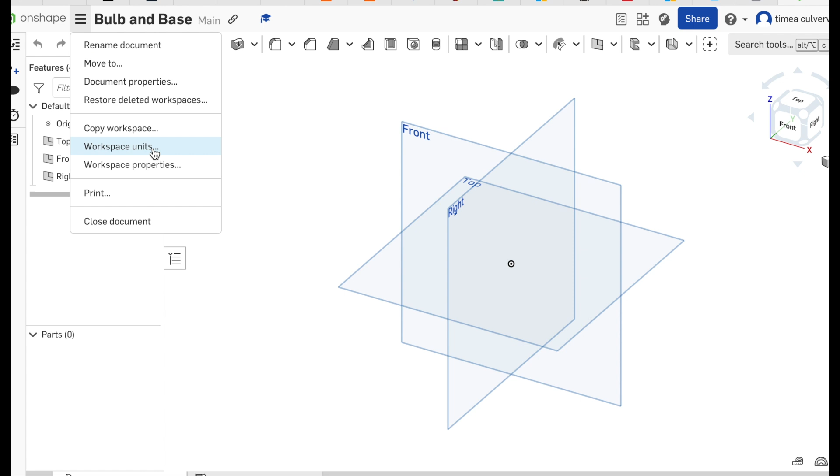Create a student account, unless you've made an account already, then log on. Click Create and select Document. We're going to show you how to make a bulb and base, so give it a name. Select the 3 lines and check that your workspace units are set up in millimeters. If it's set up in millimeters, you're ready to start.

You need to select a plane. The plane is what you're going to be able to draw on. If you select the cube at the top, you can bring this round to be facing you. Select Sketch and draw a rectangle.

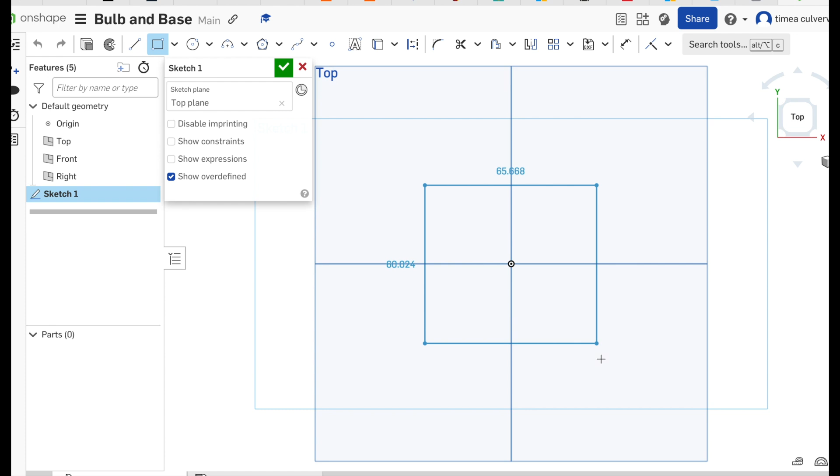Now we need to make a square that's 50 by 50. Select dimension and change these dimensions to 50 mil each, then select the middle line to the edge and make this 25. This just centers your square in the middle of your plane, making it easier to work with.

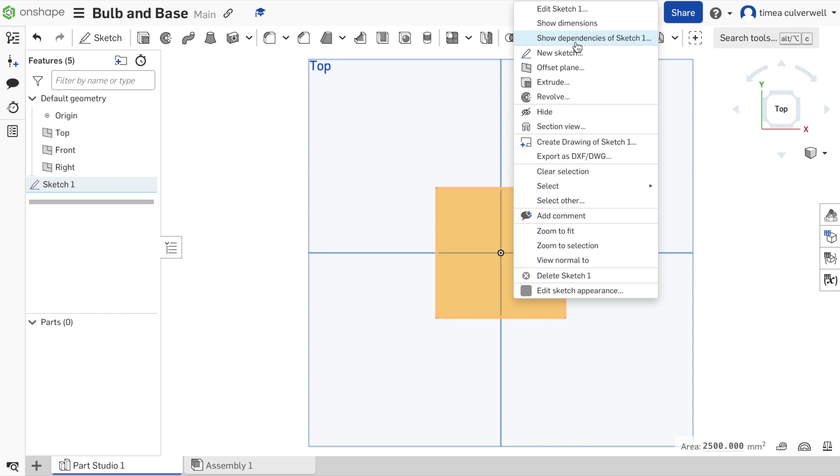Click the green tick. Now we need to add a circle in the middle. Right click and select Edit Sketch to open the sketch back up, then select the circle tool. Draw a circle and use the dimension tool to change the diameter to 20 millimeters.

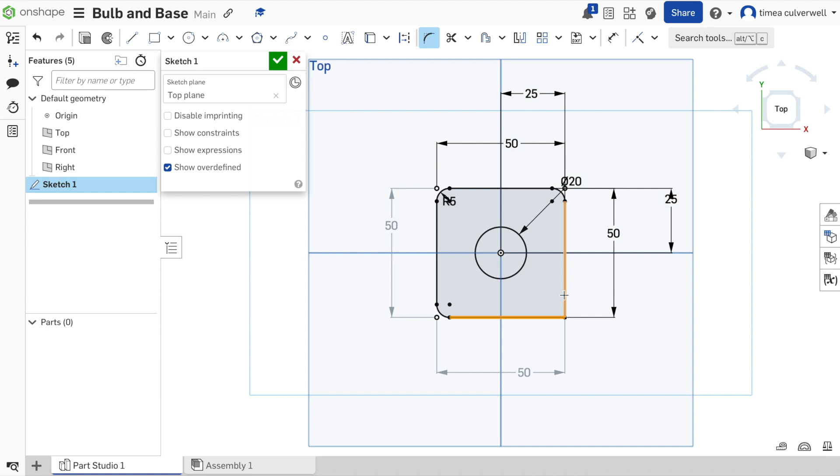If you then click on Sketch Fillet, you can select 2 edges and create a fillet with a radius. Automatically 5 mil comes up, that's fine for this. Finish that off with the rest of your corners, and when you're done, click the green tick.

Select the area you want to extrude, turning it orange, and click the extrude tool. We're going to change this to 10 mil, green tick, and this will extrude the area you have drawn. That's the first part done.

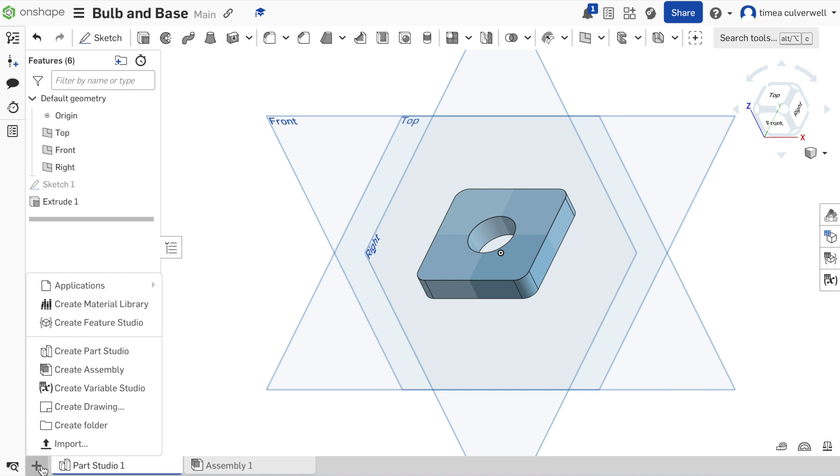Click on Insert New Tab, Create Part Studio, and you can open up a new part. This time we're going to be drawing on the front plane. Select the front plane and click the cube to turn it to face you. Sketch - this time we're going to use the line tool.

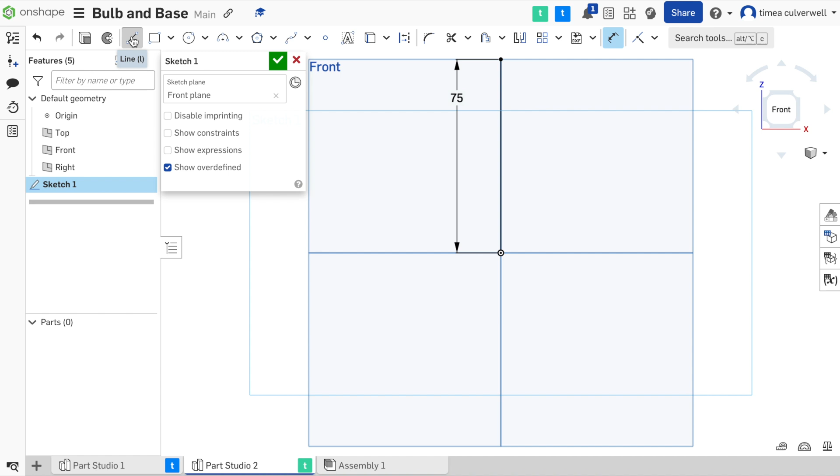Draw a line that's 75 mils up. Another from the bottom 10 mil out to the right, and another from there 10 mil up, using the dimension tool to change the length.

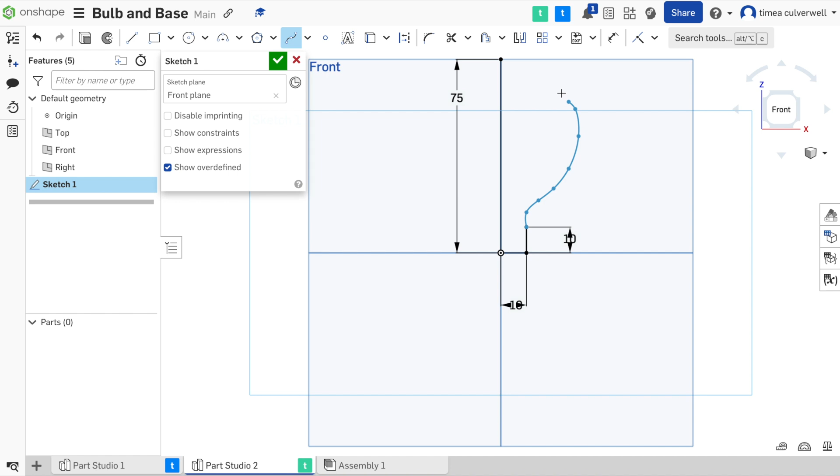Next you'll need to use the spline tool. Click the top of that last line you drew, and every time you click, you can pull the line in a different direction. When you finish, you can double click. We're trying to make a bulb shape, so we're trying to make half of a bulb.

If you want to edit your part, deselect the spline tool so you have a free mouse, and then you can use these little dots to adjust your shape.

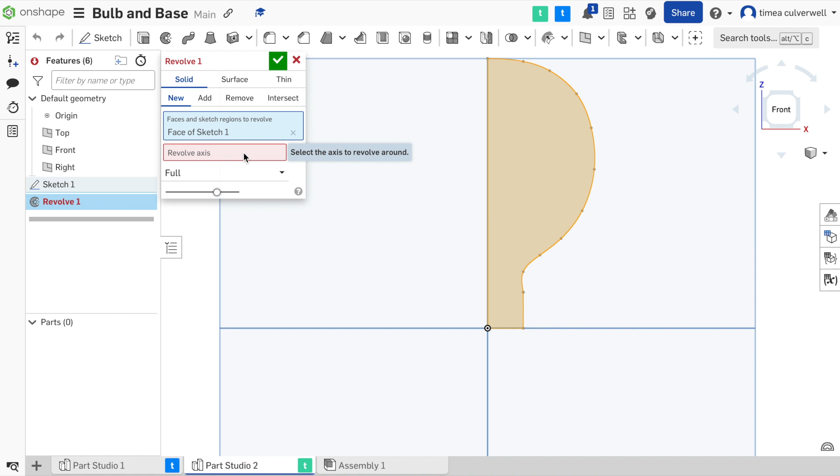When you're happy, green tick, select your shape and click the revolve tool. Deselect the red, select that central line, and it will revolve the shape you've drawn around that center line. Green tick if you're happy.

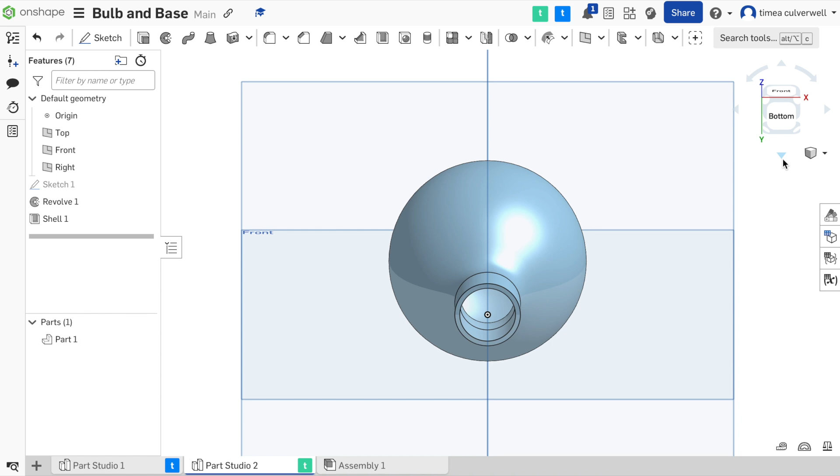We need to make this bulb hollow so it's like a light bulb. Use the shell tool, change the thickness to 1.5, and this will hollow out your bulb. Okay, so that's your bulb complete.

Now you need to assemble your parts. Go to part assembly and insert, both of your parts will appear here. Slide both of your parts into your assembly and then click the green tick.

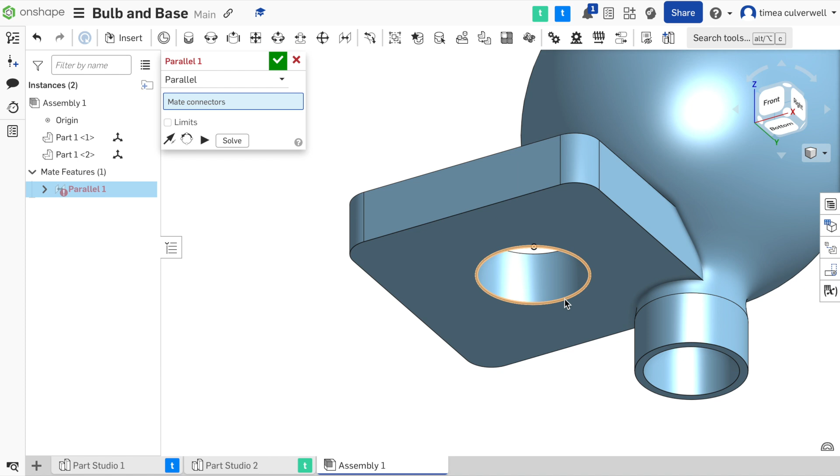You need to join them together. Select parallel mates and select the outside ring and the inside ring and join them together. Now you have joined your parts.

Well done. If you want to edit anything, you need to go back into the part studio. So here I'm going to add a filleted edge - 5, maybe 3 instead, that looks good. You could add a chamfer if you like.

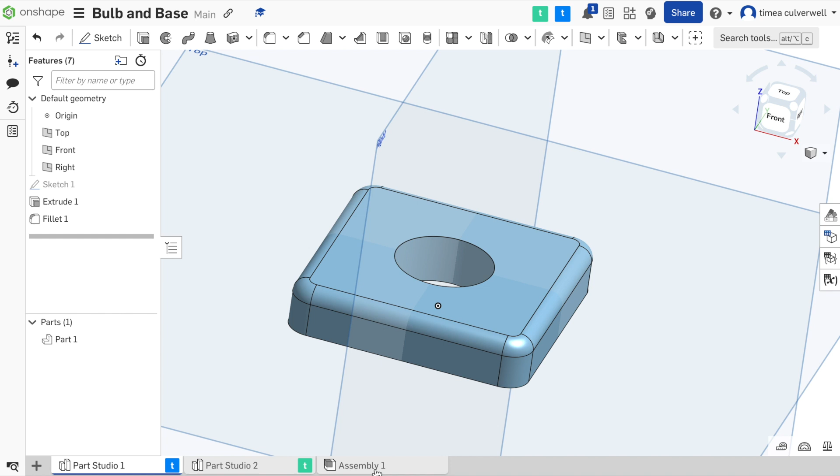Whatever you do in the part studio will show in your assembly. Well done, you finished. To save, just go back to the main menu and it will automatically save your work.